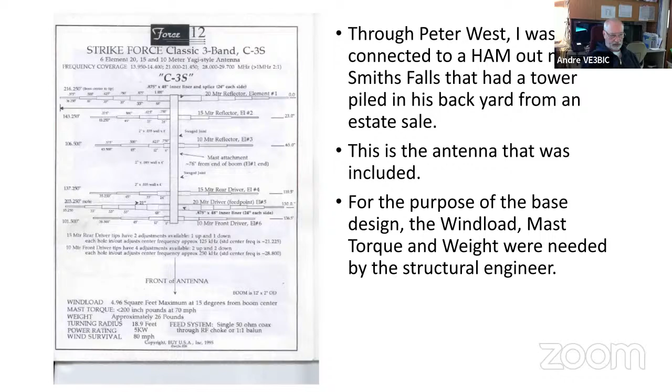This is basically the tower. It's a Wade DMX 60. What I got was about a 20-year-old tower in fantastic condition. And in preparation for it, I put a new rotor bearing on so that there would be no question about it seizing up anytime soon. What was hard to get was the tower surface area. Had to do a lot of digging, and interestingly enough, it only looks like a 3 square foot sail to the wind, even though it's 60 feet tall. So that was really surprising.

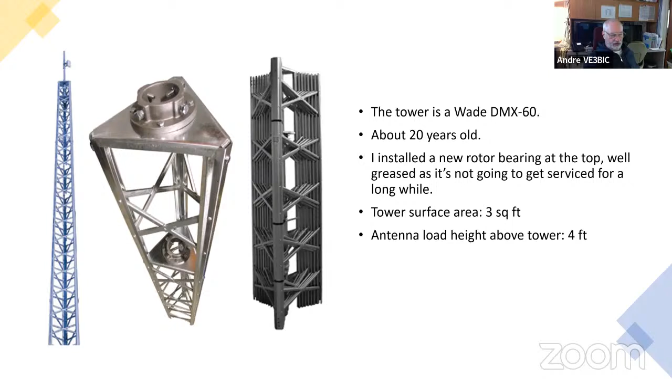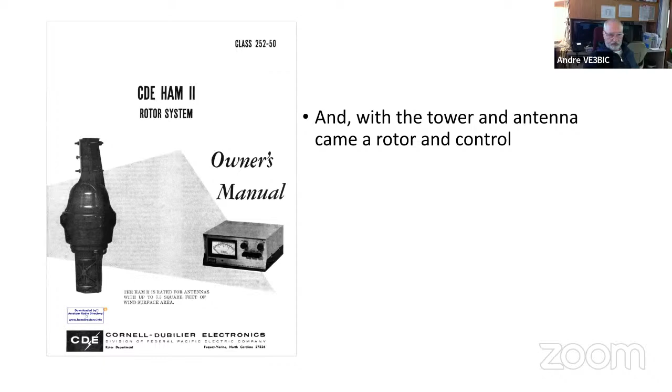The other piece of information that was important to the structural engineer was how high above the top of the tower the antenna was going to be mounted. The system came with this rotor and controller, and I'm quite happy with it. The rotor seems to have a spot where the lock doesn't engage, so some days it weathercocks, but it's not been a problem so far.

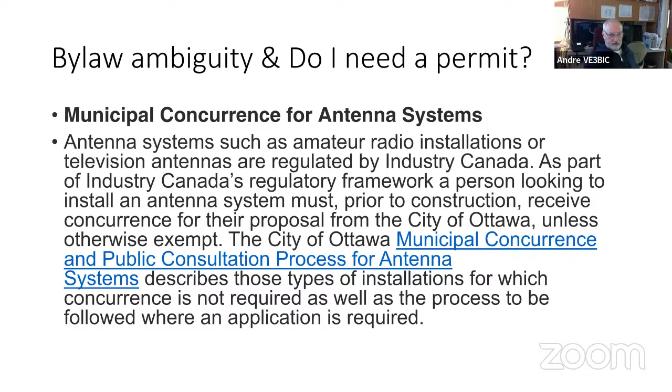So now I'm putting up a tower in a residential neighborhood. Do I need a permit or not? And I spent about 2 weeks digging through the City of Ottawa's bylaw documentation, and it is really ambiguous. It appears to be conflicting, but what did help was they have a section on exemptions.

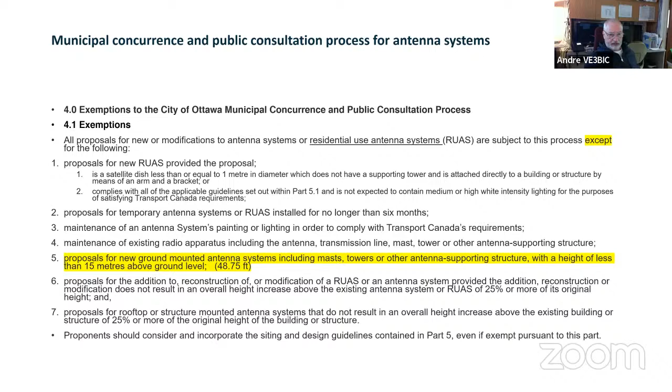So if you notice, I highlighted line 5 that describes the meter being actually the antenna supporting structure, and they include the mast and the antenna on top at 15 meters above ground level, which is 48 3/4 feet. Well, then you go to section 5 of that documentation, and they come up with less than 18 meters in height. And then section 3.2.2 talks about 16 meters in height. What am I allowed to do?

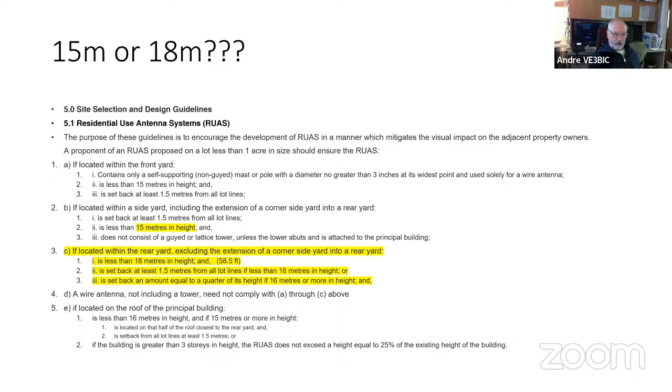It seemed to be very conflicting, and I actually ended up starting an email thread with a city planner, and the information in the yellow was the summary of her emails. And as long as I comply with section 5.1, which is I don't put a light on it, it's less than 18 meters in height total, and it's set back from all the lot lines by 1.5 meters, I'm good to go. But that was really hard. It was like trying to extract hen's teeth.

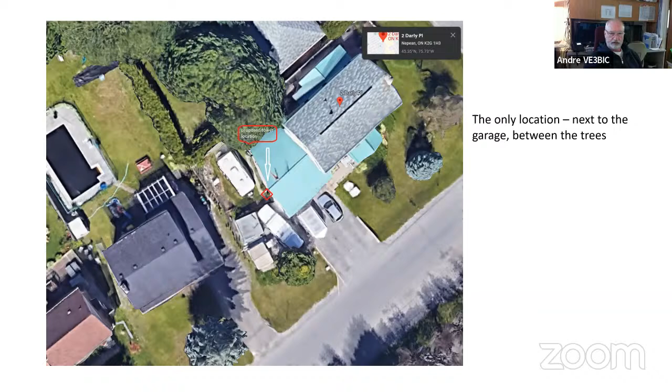A top view or sky view of my house. The yard looks really cluttered because I had, at the time, 3 trailers on the lot. But right in the center of the screen is a square in red. That's where the tower was going to be located. It puts it central to the 2 trees that may become a problem in the future. The one on my yard by the street, and the one located in my neighbor's yard.

So having the details from the tower, the details of the antenna, the okay to go ahead and build without needing a building permit, a piece of information called soil load bearing capacity, I sent everything off to the structural engineer.

Now, a couple of notes here. If you take my slides and the information that I've presented up to this point, you'll notice there's some discrepancies. And that's because what I sent to the engineer, I overspec'd the finished tower height, and I underspec'd the mast pipe for their calculations. So the whole thing would have safety margin, and it would be overbuilt. So there was means to my madness.

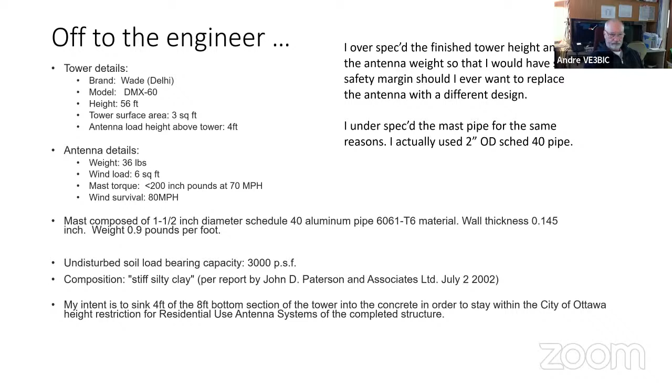If you're not familiar with soil load-bearing analysis, there are engineering firms that specialize in testing the shear, which is the side slip, and the load, which is the compressive load of the soil, so that when you build something heavy, it either doesn't sink away on you or doesn't tip.

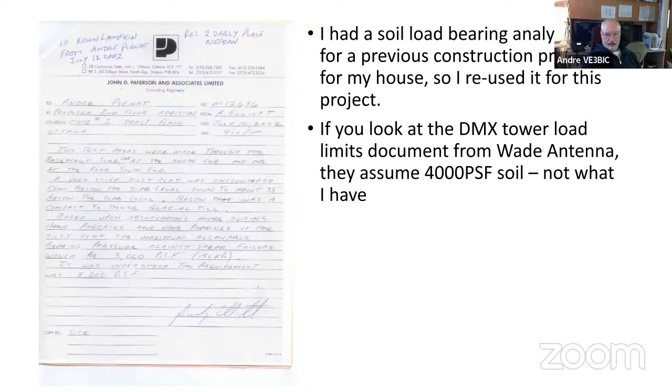So I was having some construction done. I was renovating my house, and it needed some additional support. So I had this information from 2002 still on file. It's relevant because beyond about a 3-foot depth, the soil really doesn't change over time. So I just reused this. Also, I couldn't use the Wade antenna suggestion for the base because they assumed a different pounds per square foot soil capability than what I had.

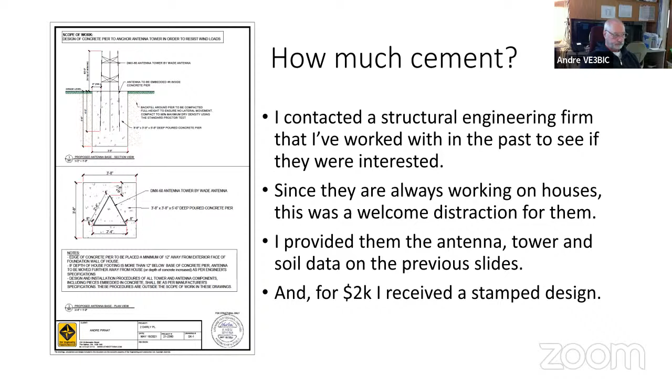Handing all of that information over to the structural engineer along with $2,000, they sent me back this 1-page drawing that specified the length, width, and depth of the concrete slug that I was going to have to bury in the ground, how much tower needed to be embedded in the concrete, and the characteristics of the concrete that I needed to use. So now I'm off to the races. And that's what it looks like with the base sunk into the concrete.

Since the tower I had exceeded the 18 meters, I elected not to use the bottom section, the bottom 8-foot section, and I took the next section and I sunk about 4 of the 8 feet into the concrete.

As prep, I wire brushed all of the leg interfaces where the sections join, and I put anti-seize compound on it. And the reason for that was to clear off any rust so that when the bolts are tightened up, it's really a good solid joint and not embedded with flake. Also, I wanted to maximize the conductivity because static electricity can be generated by the wind blowing through the tower. And if there's any insulation between the legs, you end up with a spark jump between the legs as it discharges, and that creates noise on the radios.

It was quite an experience trying to find a contractor to dig the hole. It took me 4 months to find somebody that had the time and the equipment at the same time. Concrete companies would either not return my calls, would promise and not show, until finally I found somebody who promised and did show. In the meantime, the hole kept filling up with water, and it was a regular event to pump out the groundwater. In the end, it held 2.24 meters, so that's about 4 tons of concrete.

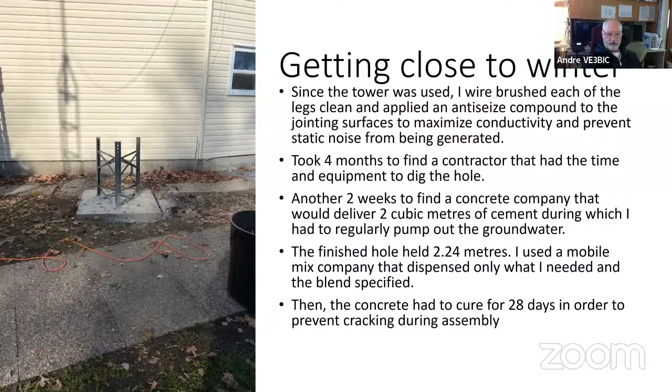After it was poured, I had to leave it in this state for a month so that the concrete set to a point where I wouldn't crack it during assembly, because there would be some side loading on the tower legs. By this point, snow has fallen. We had a little bit of snow, and I was getting ready to do the assembly.

Since I'm working above ground, I wore a safety harness through the whole experience. This particular one is called a roofer's harness. The tie off is in the back, so it leaves you suspended in the air as if you were parachuting. And because of the type of work I do during the day, I have a fall arrest course certificate, and did everything properly.

A note from the course was that this is fall arrest. This isn't fall prevention. You can always do something stupid and fall out of the bucket, fall off the ladder, whatnot. The harness keeps you from the sudden impact on the ground, but what can happen is that if you fall with enough impact, when the safety lanyard tensions up, it can actually constrict the veins and arteries in your legs with the straps of the harness. And you have about 4 to 6 minutes to call for help before you black out, because your circulatory system is completely messed up at that point.

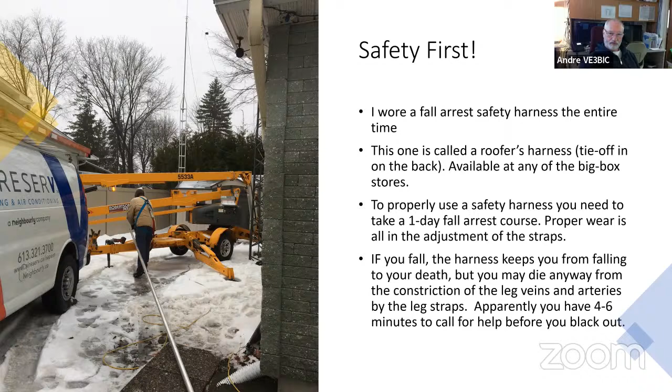This is a shot of me in the process of assembly. I built a gin pole, which is basically a pole with 4 large fingers on it that hook into the tower's cross braces, and then extends beyond the top of the section of tower that you're trying to assemble to. I used 1-inch Schedule 40 pipe for the gin pole, and it was just on the edge of not being strong enough to hold the sections of tower. You can see that I've got quite a load on there, and the pole is leaning. It didn't bend permanently, but there was enough lean that it caused me some worry when the sections were heavier.

I replaced all of the bolts that came with the tower with stainless steel bolts and fasteners to prevent corrosion. And since I'm using machine bolts, I went around with a torque wrench and torque set each bolt in the system. In this particular picture, I've got the rotor already on the top of this section of tower that's installed, and I'm just putting up the topmost section that contains the mast bearing.

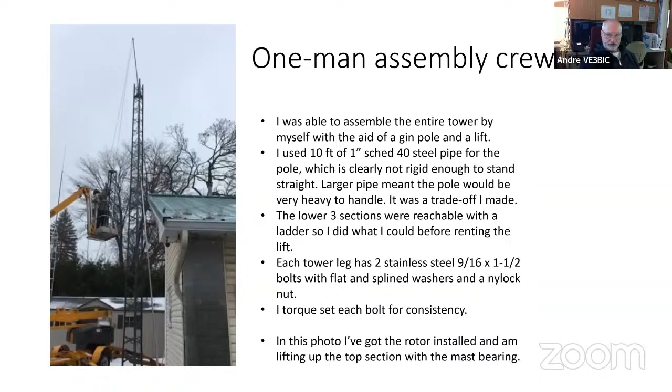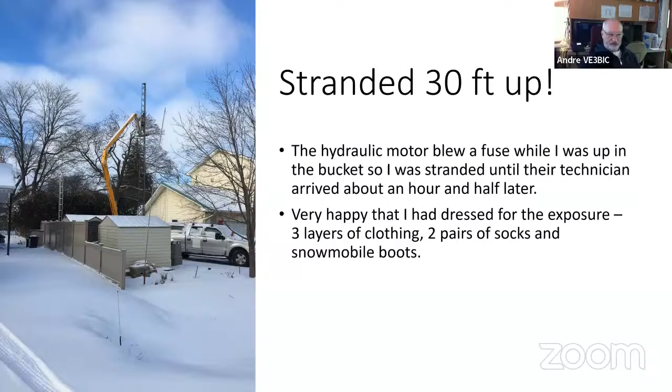Bit of experience here. The lift is all electric. This particular one is all electric, and it blew a fuse. So for the next hour and a half, I was stranded 30 feet up. Couldn't get out and climb down the tower. Couldn't lower the bucket. So it was an interesting afternoon.

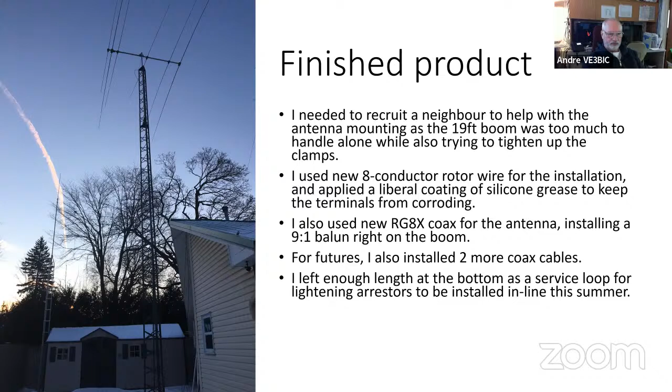Did I miss anything? Yeah, as I mentioned earlier, the front label on the drawing, I missed that. And so I accidentally mounted the antenna 180 degrees out of direction. I was really lucky. The rental company was running late with their pickups, so I jumped into the bucket quickly and spun the mast around in the rotor.

And final performance, this is what the SWR looks like on the Yagi, 20 meters, 15 and 10. They're all less than 1.2 to 1. So I'm really happy with that. And that's the end of my show.

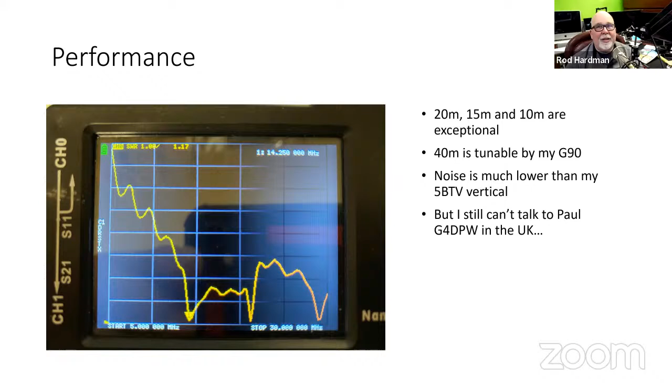And Paul's still trying to get a hold of you. So that's... Yep. I believe in conditions. I believe it's going to work out for you. So any questions? No. I have a question. Yeah, go ahead. Looks good.

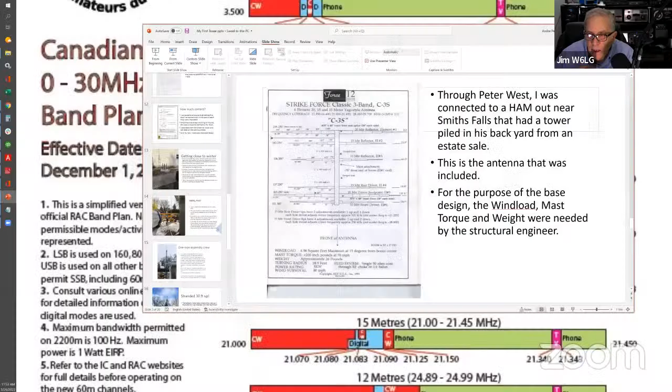Yeah, Andre, you did not have to get a permit from the city after all? I did not. Okay? And did you submit engineering to the city? No, they did not require any documentation. They really didn't want to have anything to do with it, as long as none of the neighbors complained. Yeah. And so before I went to the engineering firm and started spending money beyond the cost of the tower, which I could have resold if this was going to be a problem, I polled all of my neighbors, and they all said, "Hey, go ahead, knock your socks off." Yeah. My neighbors complained. I had 4 notices of complaint before the first month.

On your engineering, did you get a stamped, signed set from the engineering company? Yes, I did. If there were going to be any insurance claims because of something going south on me, either during assembly or later on, I wanted to be able to support why I built it the way I built it. Excellent. Oh, and the distance from the side line of the property to the bottom of the tower, did that meet the setback requirement?